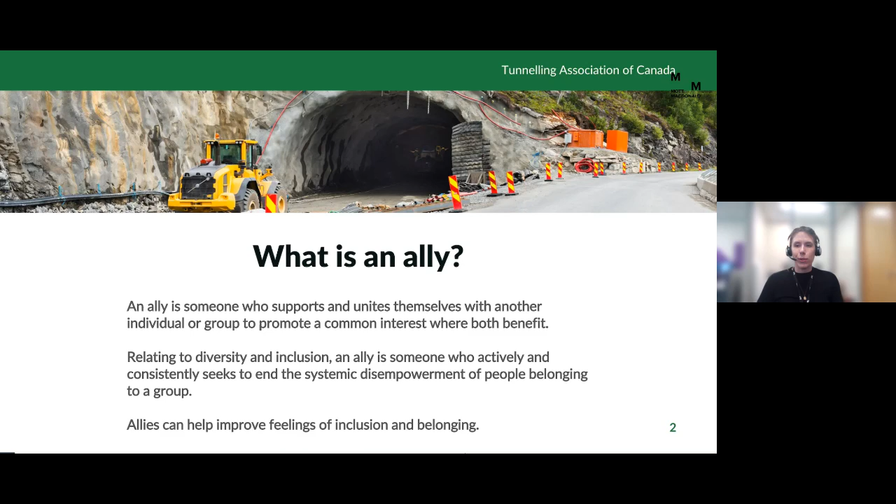Relating to diversity and inclusion, an ally is someone who actively and consistently seeks to end the systemic disempowerment of people belonging to a group. Allies can help improve feelings of inclusion and belonging. So how do you practice allyship?

Be a true listener, respect people's lived experiences when they share them with you, provide solidarity, stand behind, not in front of, provide the support you are asked to provide, not what you would imagine would be helpful or what you would do. Apologize for any mistakes you make. For example, if you use incorrect pronouns for someone or incorrect pronunciation, and move on without waiting for forgiveness from that person. And recognize the groups that you wish to ally with are not homogeneous in their thinking.

So now on to the agenda about what we'll be talking about today. So we're going to go through what's the purpose of site investigations, the geotechnical parameters that are of interest on tunneling projects, some different methods of data collection, but we're not going to go into exhaustive detail on that, field and laboratory testing, staging site investigation programs, and then we'll talk a little bit about uncertainty in parameters and interpretation, and finally, we'll end with some data visualization.

So I want to start by giving you a little bit of a disclaimer, and that is that every single tunneling project is unique and that there is absolutely no one-fits-all solution. So the answer to site investigation and the questions in this presentation is typically, it depends.

So let's start by thinking about, why do we need site investigation information? And the site investigation information really comes down to defining risk, selecting methods of mitigating that risk, and allocating that risk. We use site investigation information in tunneling to select our alignment, whether that be in the horizontal or in the vertical plane. Selecting the right construction methods, so that can be both excavation methods and dewatering requirements.

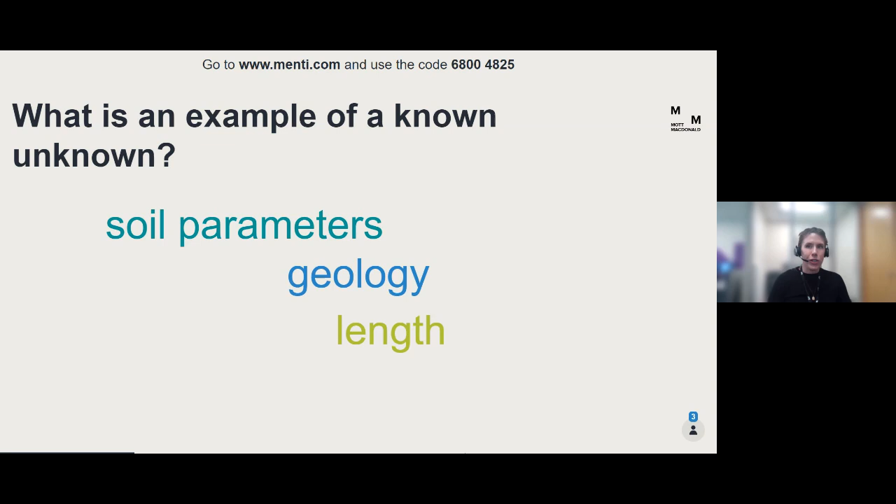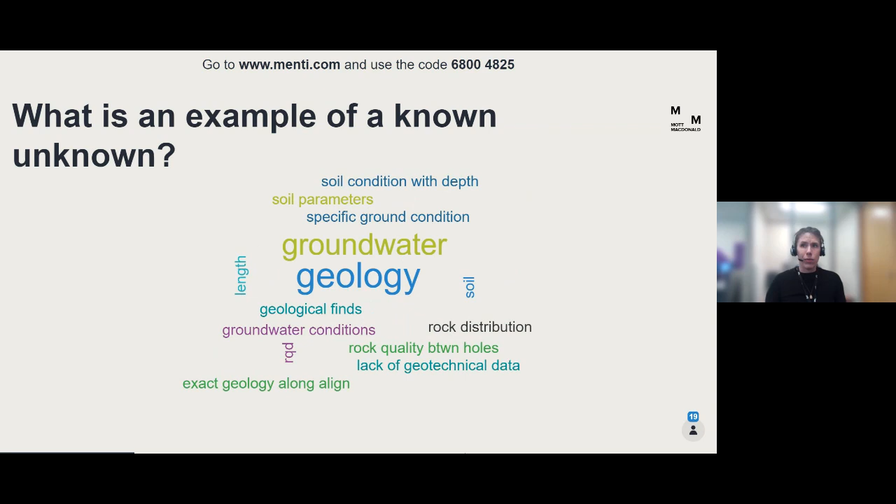The geology, definitely the geology. We might know a little bit about it, but we don't know a lot until we do a site investigation program. Groundwater conditions, that's another definitely known unknown that we would want to get more information on. Rock distribution, perfect. RQD, great. So those are all things that we can get more certainty about by doing a site investigation program, but at the beginning of the project are definitely a known unknown. We don't have much information about it at all.

So the last bit that we think about when we're talking about a site investigation program are the unknown unknowns. So these are the big risk items. So what would be an example of an unknown unknown on a tunnel project? Something that you don't know that you don't know about. We'll wait for a few examples here.

An anomaly, buried objects. Yeah, buried objects are a key one there. Hidden tiebacks. So man-made things that you don't know are there. Maybe you have poor construction records in the area and you encounter them and then they cause a lot of challenges in your project because you didn't expect them to be there.

Historic workings, yeah, unexpected shear zones. That's another great example. So faults or shear zones that you didn't have any evidence of, didn't occur during your site investigation, and you don't know that they're there. An old fill area. So those are all great examples of unknown unknowns, unmapped features.

So just wanted one example here, and just the impact it can cause when you have arguably an unknown unknown or a known unknown, giving the example of the Alaska Way Viaduct project. So many of you know that there was a huge delay on this project. They had to build a rescue shaft, design a crane, remove the TBM cutter head, and replace the main bearing of the tunnel boring machine.

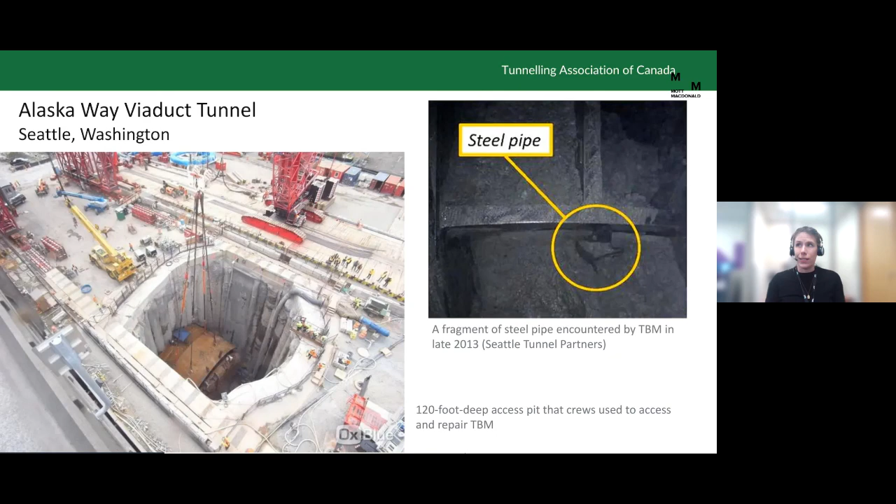So let's talk a little bit more detail about what information do we need. One of the things that came up through those known unknowns and unknown unknowns were the subsurface conditions. So this is a key for your tunneling projects to classify the subsurface conditions and characterize them. So this looks like the distribution of rock and soil, the different types, their properties, the condition of them, and stratigraphy. Another thing that was highlighted in those unknown unknowns was obstructions.

So we want to get a good idea of past construction in the area, of boulders we may encounter, of groundwater conditions, and other potential risks like environmental conditions, previous use of the site if there was a tannery there that might have caused some contamination.

And we want to get a really good handle on all the different sorts of geotechnical parameters we need for tunnel design. So there's parameters we want to get for soil, for rock mass, for other sorts of conditions, groundwater, and environmental. And we'll talk about some of these in a little bit more detail.

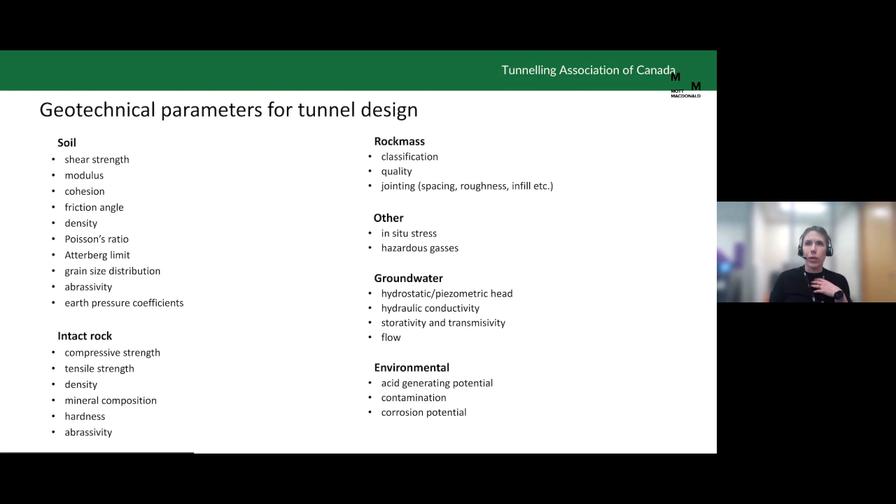So let's first talk about rock mass conditions, about the strength and quality of our rock mass. So why is this something we care about in tunneling? Well, it's an input into the assessment of our rock mass behavior, and it informs our construction methods and support selection. And we get this information by field mapping, by core logging, through laboratory testing, things like unconfined strength testing, and in situ testing as well.

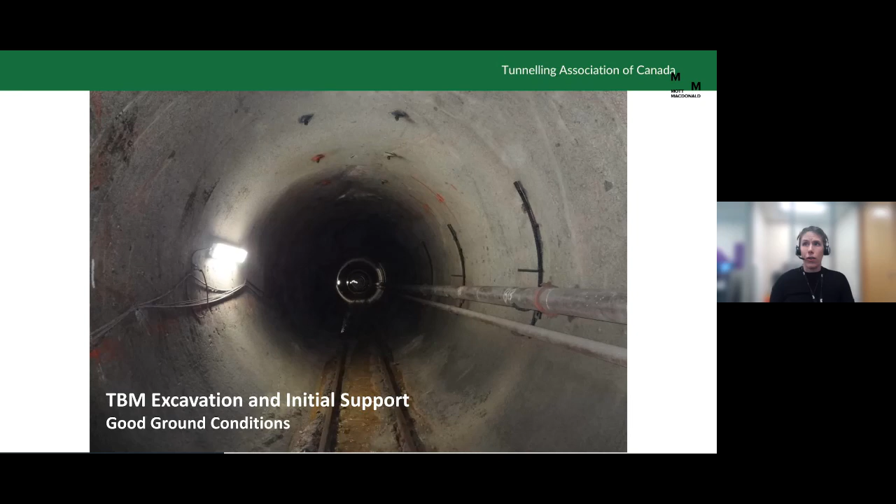So why does this really matter? Let's look at it in some photos. The variability of our rock mass conditions can completely impact the behavior of our tunnel. So this is an example of a TBM tunnel where excavation and initial support was in good ground conditions, and you can see a nice beautiful profile there. That's all exposed rock, so really nice tunneling conditions.

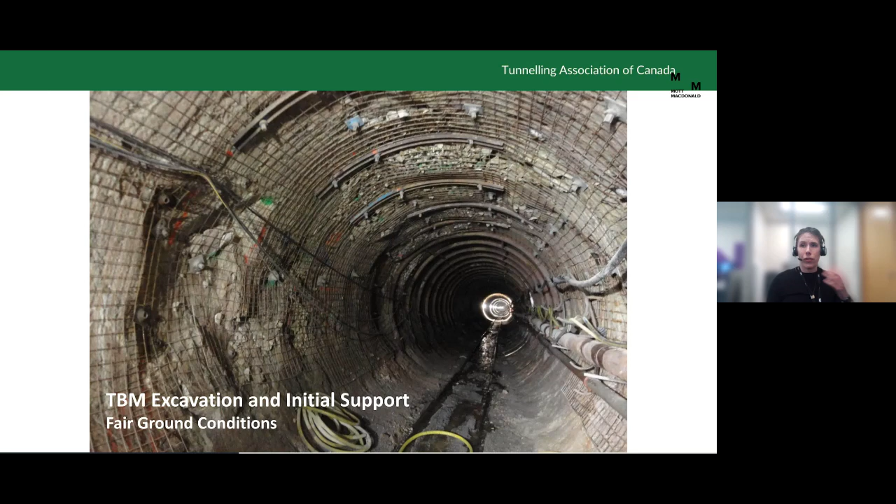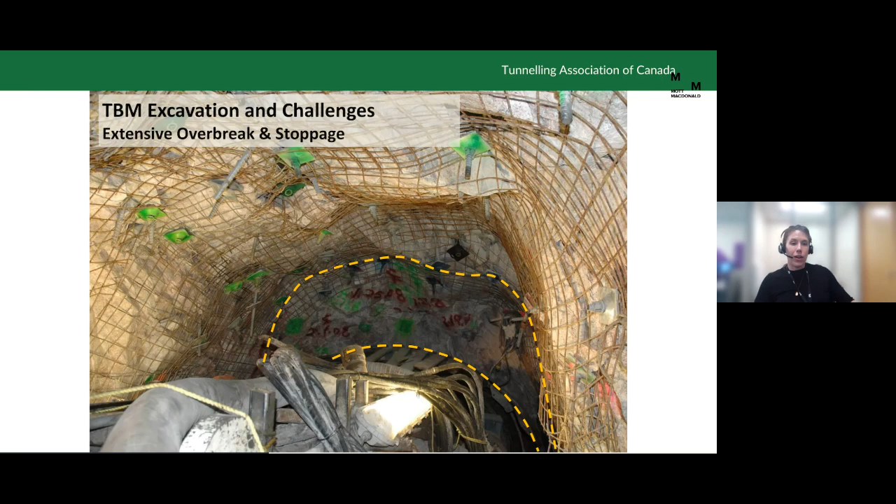And same tunnel again in our extensive overbreak and stoppages caused by very poor ground conditions. And these conditions weren't expected during the excavation, so weren't designed for and caused some significant delays on the project. So this is just one case example of why understanding those rock mass conditions is key at the outset of our project.

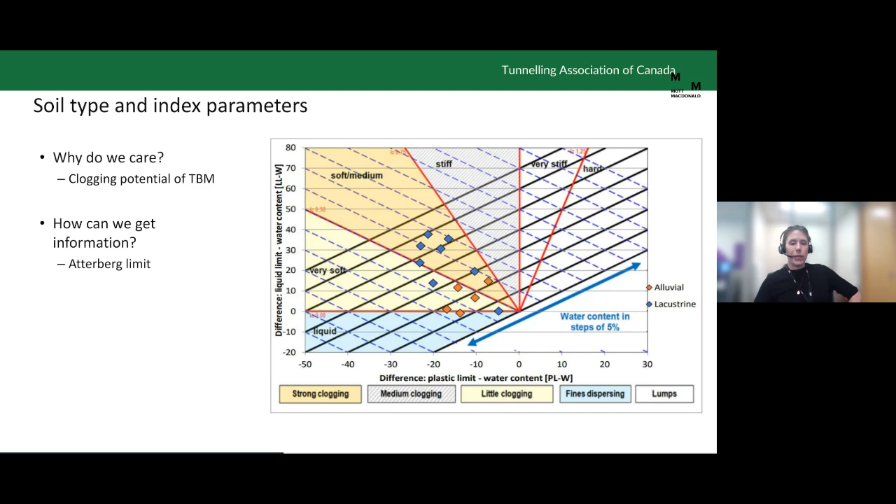So another thing that we'd want to know is the soil type and index parameters. And one of the key reasons to know this is the clogging potential of the tunnel boring machine. That's something we can get with Atterberg limits. So there's different ways we collect different pieces of information that are key for our tunneling design. So grain size distribution is another key soil parameter for building a tunnel in soil because it informs our TBM type selection, and we get this information through lab testing through sieve tests.

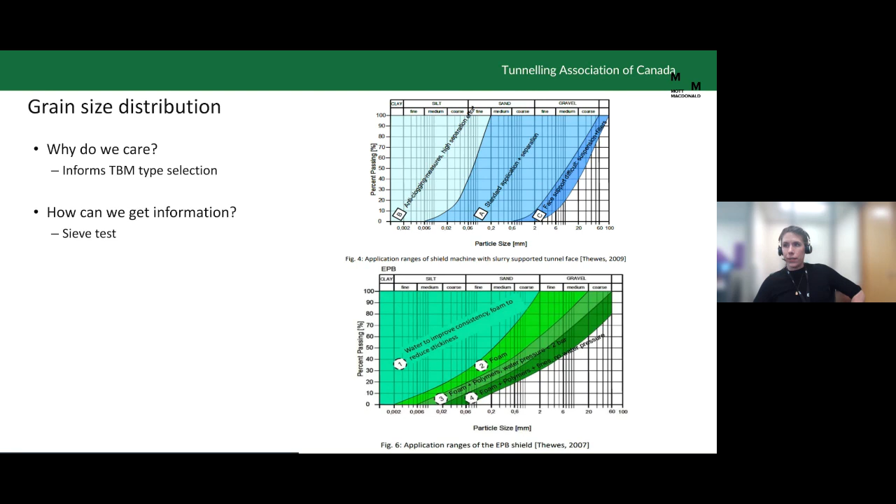For tunnel design, abrasivity is another key parameter as it impacts our rate of tool wear, and in turn, our advance rate prediction. So we can get this information from lab testing and petrographic analysis of rock and soils.

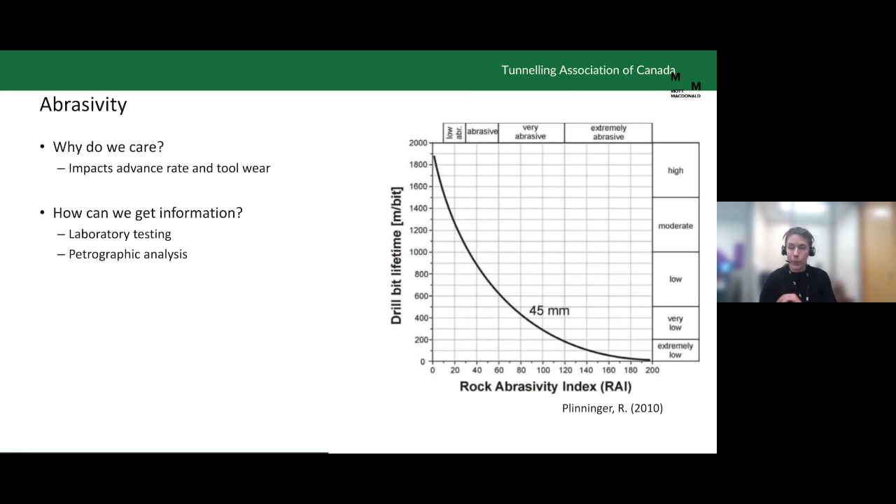Another key parameter is in situ stress. So in situ stress can have a huge impact on ground behavior. It can cause squeezing, spalling, overstressing, rock bursting in extreme cases. And we need to know those things in advance to inform the selection of the construction method and the support we need. And often in situ stress testing is challenging, but it is possible. But we also rely on past project experience in similar ground conditions in similar areas to get information on in situ stress. So this is just an example on the right here of failure that was exacerbated by in situ stress.

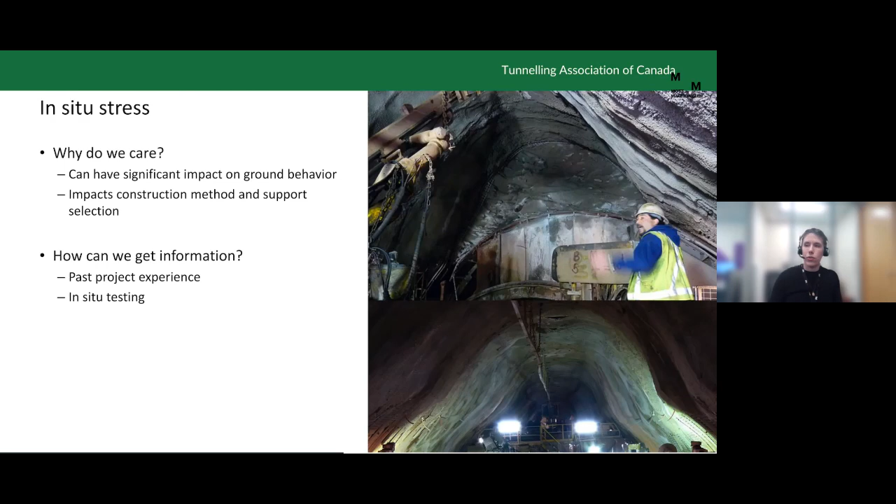Mineralogy is another key thing that we look for during our site investigation program. So different types of minerals can be detrimental to excavation. This could be swelling minerals or silica dust. On the right, you have an example of a project where swelling minerals caused about 1.5 meters of floor heave in the tunnel. So you can see how significant an impact that can have. And we get information on the mineralogy through petrographic analysis and X-ray diffraction.

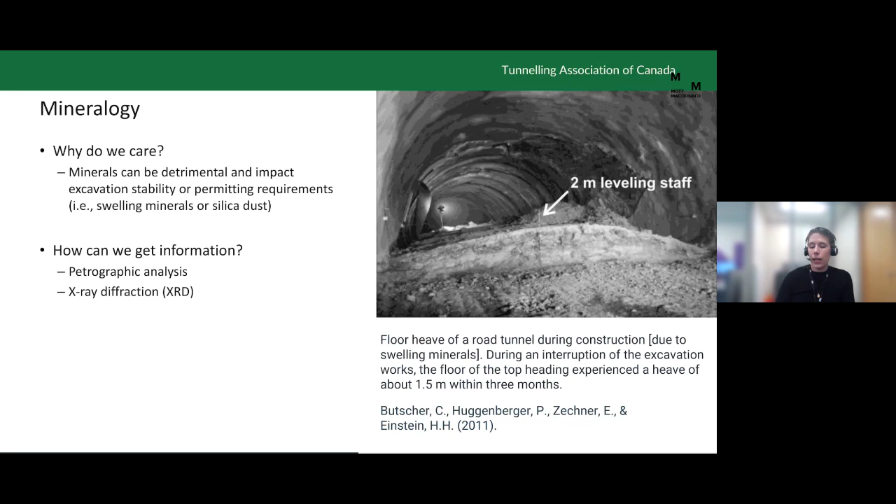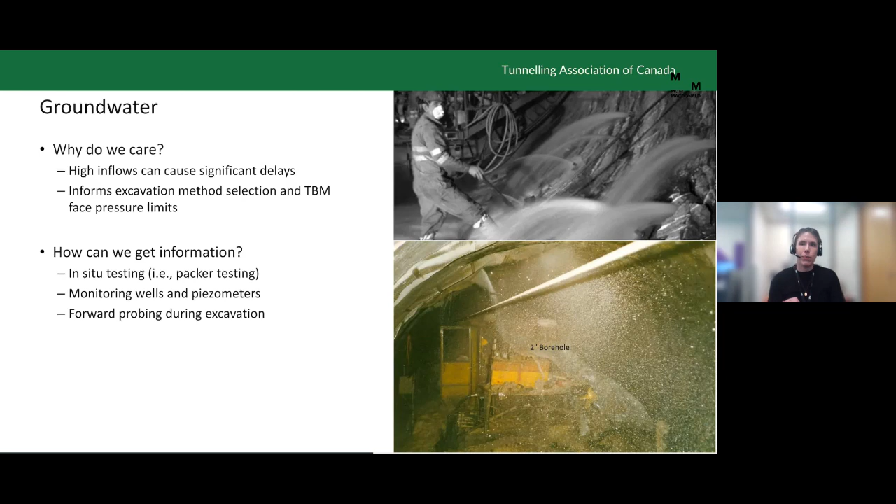And just for context, that photo on the right, that thing that looks like a rope, that's actually a stream of water coming from a 2-inch borehole. So really, really high pressure, safety issue at that point. So we want to know those groundwater conditions ahead of time. And we do that through in situ testing, through monitoring wells and piezometers, and through forward probing during excavation as well, and can manage it through pre-excavation grouting.

So let's now talk about the stages of a site investigation program. Typically, we don't do all the investigation at once. There's different stages of investigation aligned with the progression of our design. So at the concept or feasibility stage of a project, there might be limited on-site site investigation. We'd start with a desktop study. Then as we move into preliminary design, moving into field mapping and a site walkover in order to inform and plan your stage 1 investigation program. And then as you move into detailed design, often you'd plan a stage 2 investigation program where you're filling in more details.

The deliverables out of each of those look slightly different. So at the desk study stage, we'd be looking at something like an initial geotech assessment, moving into a preliminary geotechnical data report, an interpretive report during your stage 1 investigation. And as you get to the end of your detailed design, often your deliverables look like a final geotechnical data report, interpretive report, and geotechnical baseline report. Now, I'm not going to talk in a lot of detail about those different deliverables today because we're going to talk more about the investigations themselves.

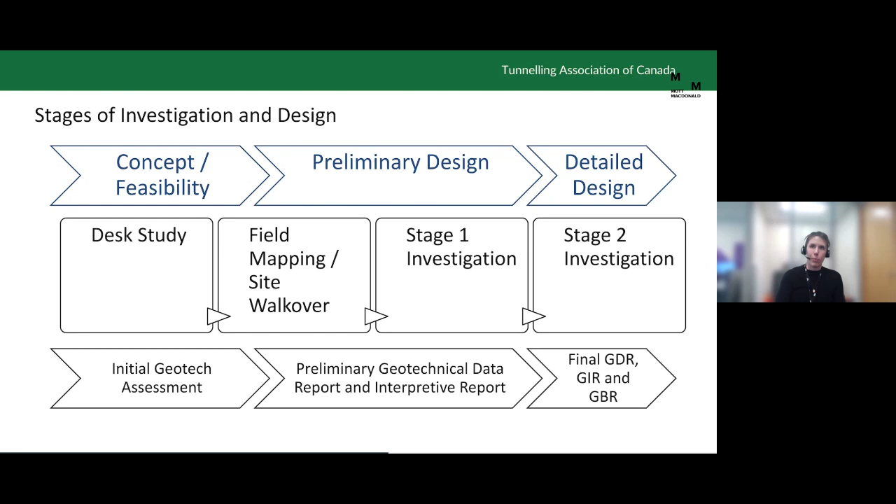So a desktop is typically what you do at the start, at the concept stage. You should always be starting with a desktop study, looking at historical investigations and available data that you have from past projects in the area, any past project construction experience, available geological maps, be it bedrock or surficial or soil data, air photos of the area, especially if you can get air photos of the area over time to see historic use and change in the landscape, information about seismic hazards or other hazards.

Walking through the area on Google Earth can be really useful, looking for overhead obstructions, roads, railways, those sorts of things, and any areas of interest, be it archaeological areas, if there's areas of environmental sensitivity, and understanding historic use of the site, which can help you understand if there's any contamination.

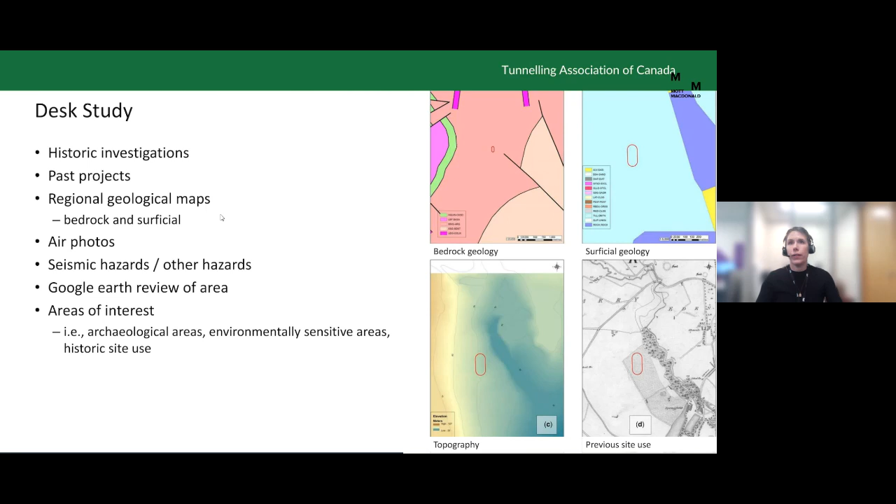The next stage we would move into is field mapping and a site walkover. So now we're assuming we know where our project area is, where our approximate tunnel alignment is, and we want to get a better understanding of potentially adjacent infrastructure, sensitive buildings or overhead power lines, if there's any access constraints that we might be dealing with both during our site investigation, but also during construction.

We'd be looking for evidence of potential geohazards, so that's things like slope stability issues, completing geological mapping of outcrops or subcrops if there is exposure in the area, collecting information on jointing and rock mass conditions, and geology, and also selecting locations for further investigation. So a site walkover is the best way to site where you want to actually be drilling your boreholes or performing any other types of investigation works.

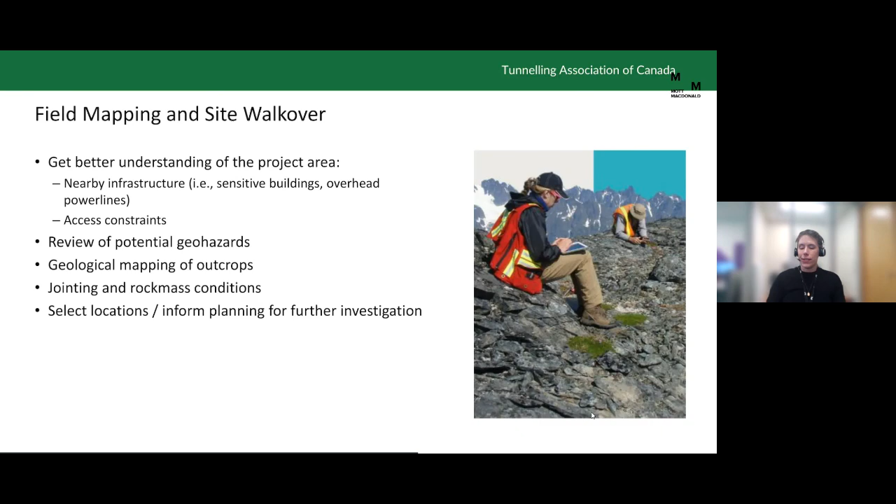Remote sensing is another way we collect data. So methods of remote sensing include LiDAR, photogrammetry, collecting drone footage or satellite data like InSAR, and those different methods can be done airborne. There's mobile terrestrial ways to collect that data, so that means on the back of a car, or static terrestrial, so on a tripod. So the examples on the right are just different types of LiDAR data.

And through that, you can get topography, a very good model of your site surface. You can do site characterization and also gain geotechnical data. So from LiDAR surveys, for example, you can get joint orientations, shear zones, those sorts of things.

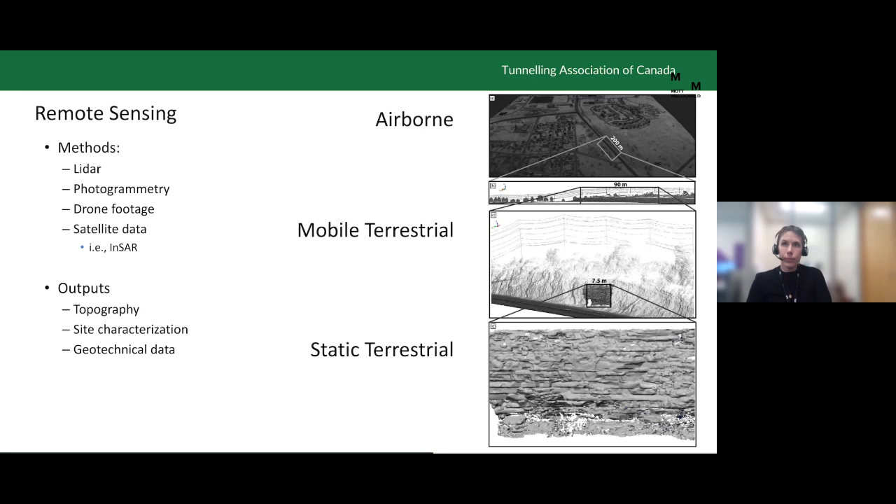Next, we get into our actual intrusive site investigation methods. So test pits and trenches. These involve excavating the first few meters of soils, and those help you understand the stratigraphy that you're dealing with. You can identify cobbles and boulders size and distribution using these type of methods. But the challenge with test pits and trenches is they're limited in depth and stability depending on the soil types, and you only can collect disturbed samples from test pits.

Next, we have geophysical surveys. There's a variety of methods available for geophysical surveys, and I'm not going to get into detail on all the different methods today, but those can help collect different types of subsurface information. And then boreholes, where you're collecting samples of soil or rock and can complete in situ testing.

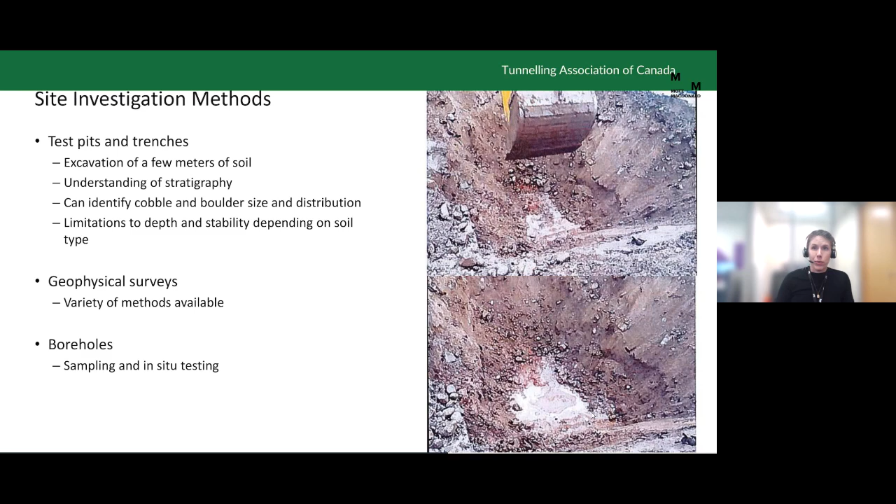So everyone grab out your smartphones. We have another activity here that I'm going to ask everyone. So, should you do geophysics or boreholes first? I'd like to see your votes on which you think you should be doing first. There's 4 answers to pick from: geophysics, boreholes, it depends, or not sure. So I'm going to give a minute or two for folks to respond here.

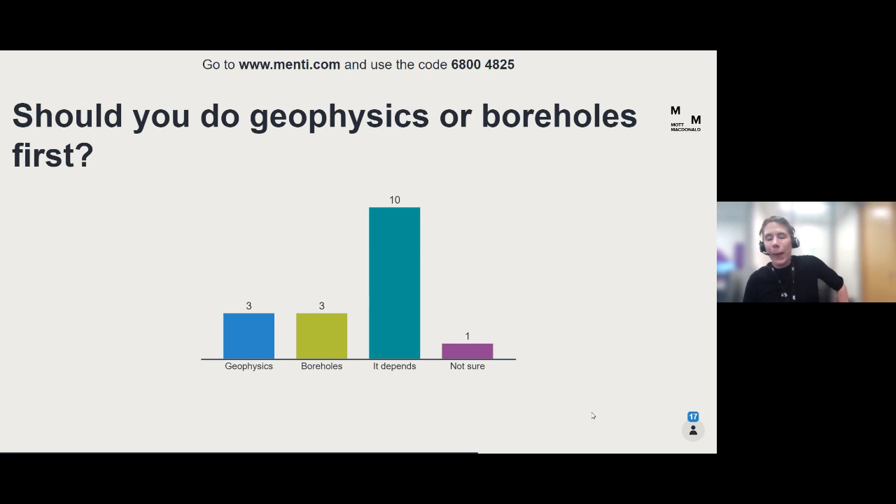So far, I see 2 votes for boreholes, 1 for it depends. Oh, it depends is taking the lead. You say geophysics, more saying it depends. I'll let the answers keep rolling in, but my opinion on this topic is just like everything in geotech, it depends. The most important thing is that you're tying your geophysics and your boreholes together.

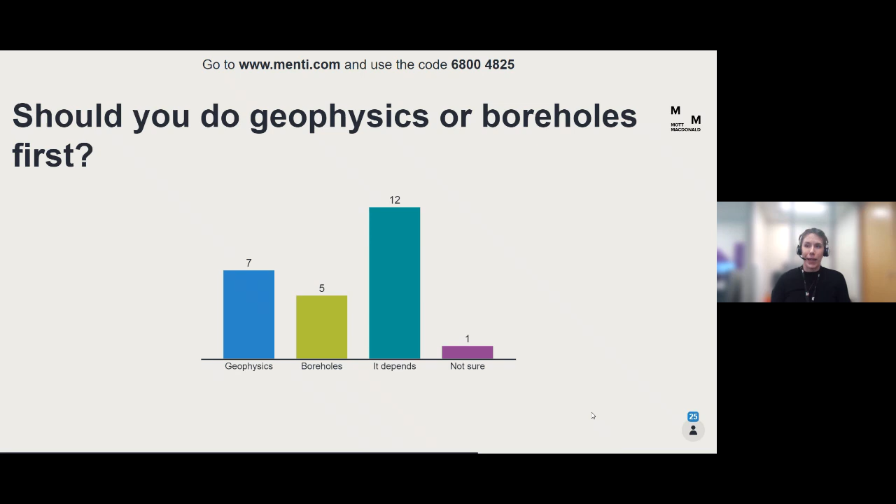Sometimes you do geophysics first and you'll find anomalies that you want to check by using boreholes. Sometimes you'll do boreholes, and in order to tie your boreholes together, you want to do geophysics. So I don't think there's a right or a wrong answer about which you do first. I think the answer is it depends, and it's on a case-by-case basis.

All right, so we have another activity here. So I'm going to give some background. So this is a project where each color shown on this section is a different geological unit. These are all rock units, and they're all dipping to the left-hand side of the page. So those dashed lines there are the contacts between the different units.

If you look at the plan in the top, you'll see blue areas, and those blue areas are glaciers. So if you're drilling on top of the glacier, you do need to consider that you're going to be building a platform on ice and dealing with a moving glacier. On the glacier to the left-hand side, you can see a red squiggly line. You can see it in the section as well. That's an inferred fault. So no evidence of that fault, but it's assumed to occur there due to the contact between the 2 different units.

So what I would like to know, if you only had the ability to do 1 borehole, where would you locate that borehole? I'm seeing a couple different locations that people are picking, so we'll give a few more seconds here. Someone's picking the top of the mountain, I see.

So just for scale too, the tunnel is under about 1,000 meters of cover. So drilling from the top there, we'd be drilling over a 1,000 meter borehole. Do you have any other thoughts? I see lots of dots on the page so far. Some at the end, some at the portals, some on the purple. Awesome. So lots of different ideas of where we should be drilling boreholes for this alignment.

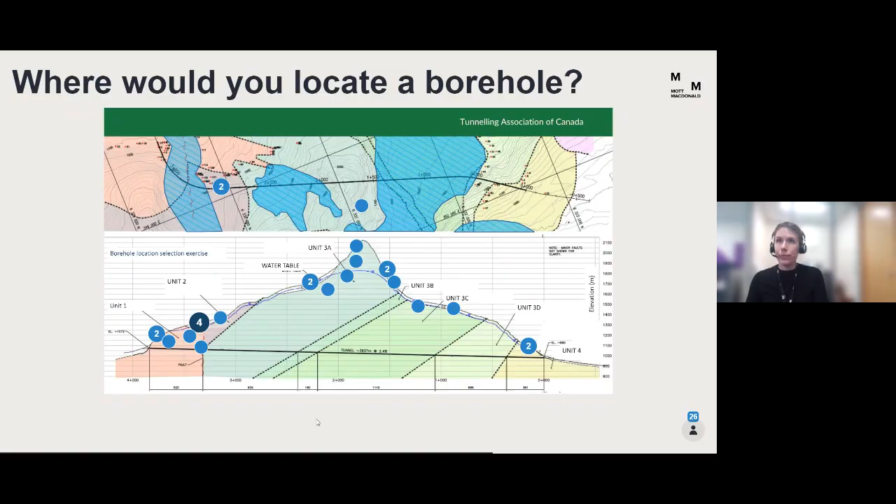So one thing when we're doing our site investigation programs is that we want to characterize varying site conditions. We've got to recognize that tunnels are linear projects that go through a range of conditions, and that rock mass variability, even if we're in the same unit for the entire length of the tunnel, can lead to different performance of our tunnel. For example, the angle of schistosity can cause a significantly different response to our tunnel. So this is an example of a project that was all constructed in the same schist unit, but the angle of schistosity relative to the tunnel or to the loading direction significantly changed the compressive strength of the rock mass.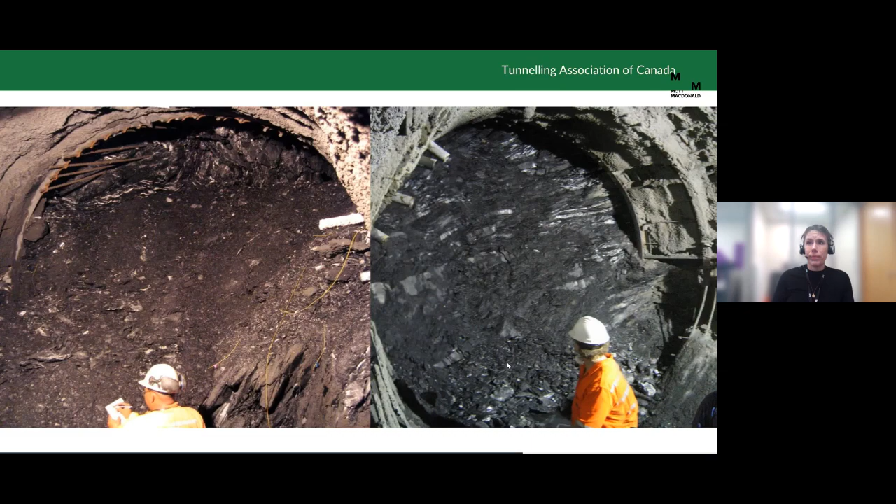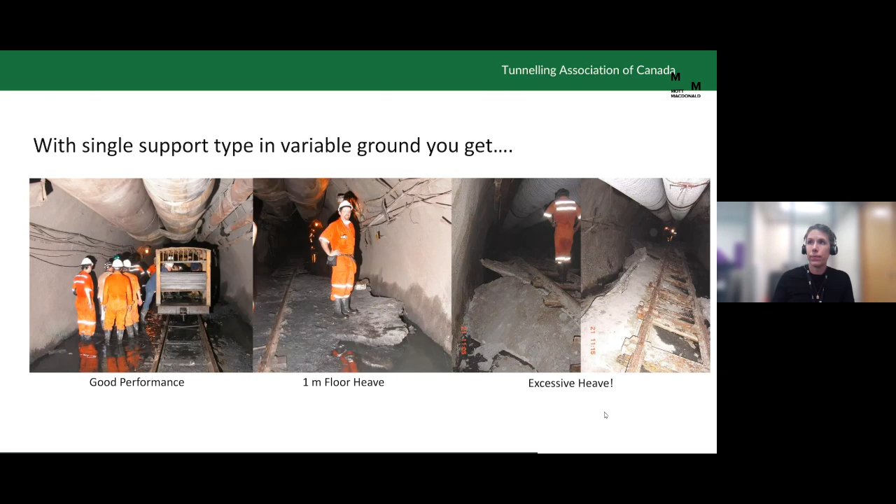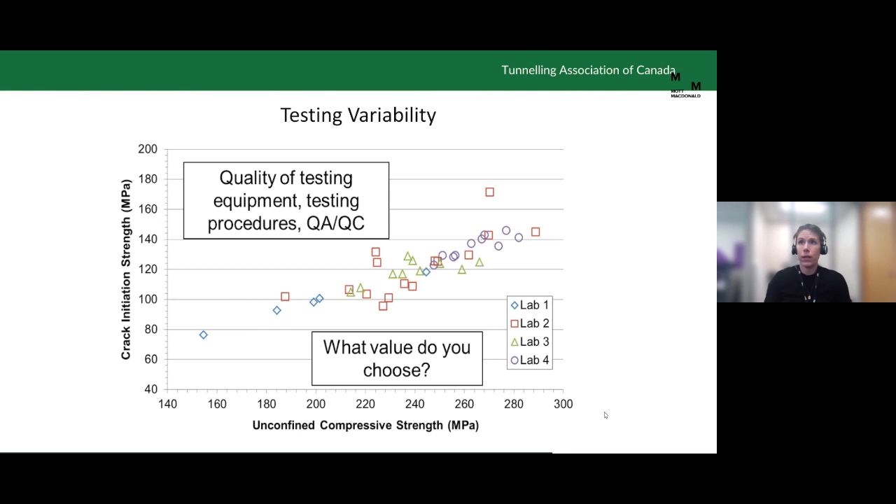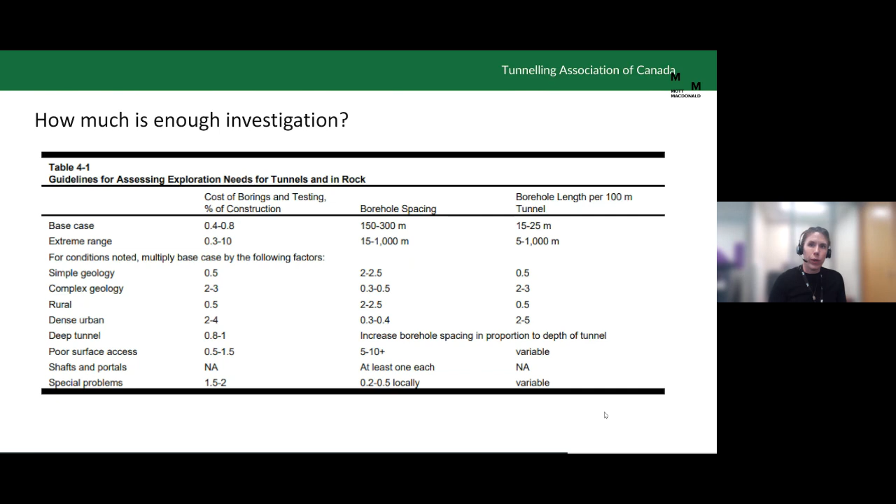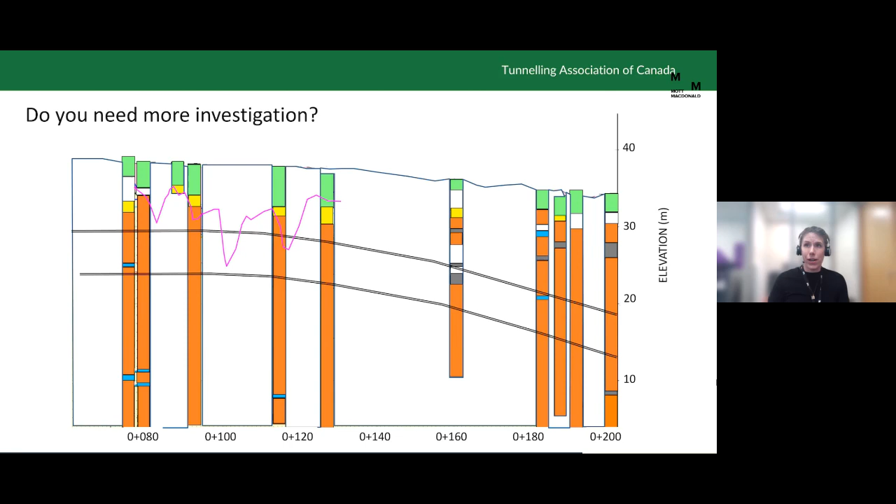Yes, possibly buried valley. Another yes, potentially Buried Valley. If there's budget, then yes. Yeah, I like that answer. Yes, to find out the dip in the geophysics. Yes, yes, water level, soil profile varying. Yes, no, yes. So lots of different thoughts here. Yes, investigate the dip in the purple line.

So I would say the answer, in my opinion, again, is that it depends. It depends on what your design solution is. Does your design solution care that you're going through rock or soil, or do you have a robust solution that is sufficient no matter the ground conditions? If the soil or a dip in that soil presents a big risk, then it would be more important to characterize if that actually exists or not.

Do you have enough fair information or not? It all comes down to risk mitigation. Might be a fault. So if you do think there's a reason that there's a fault there, that might be something you want to investigate more. So again, answer is it depends. And like I said, it really comes down to risk versus mitigation.

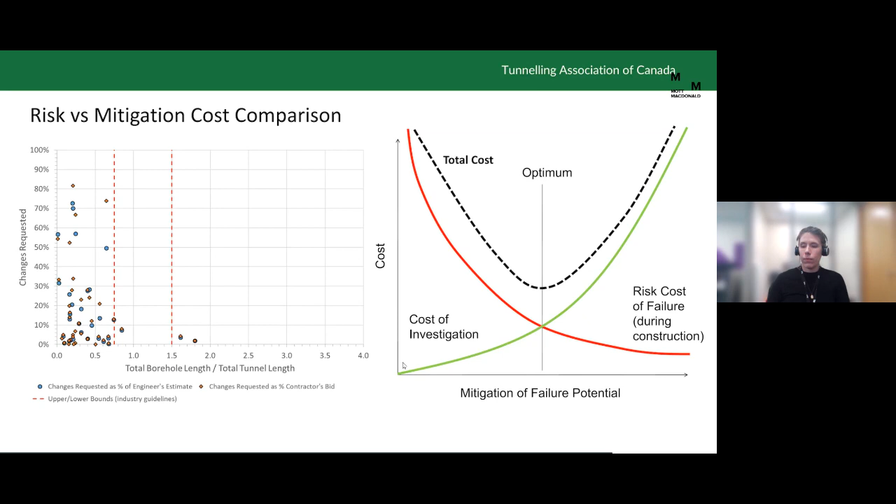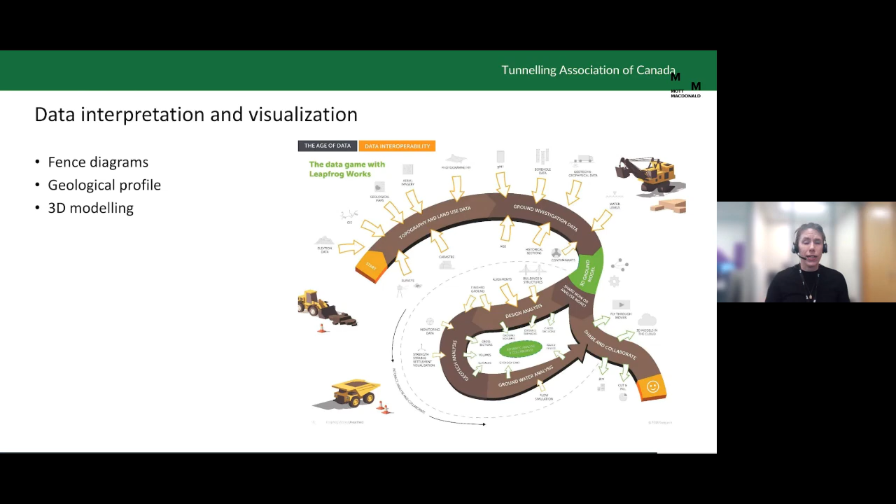So then I'm going to move on to the last part of the presentation, which is about data interpretation and visualization. So once we've collected all this information, part of it comes down to writing our reports and our deliverables and putting together our geotechnical baselines. But again, I'm not going to talk about those in a lot of detail today. But one of the things we do is trying to visualize our data. And that can come down to things like fence diagrams and geological profiles. But what's becoming more and more common these days is 3D modeling. So I'm just going to switch screens here and show you some examples of 3D modeling of geotechnical site investigation information.

So this first example here is using, and I'm hoping this plays. Oh.

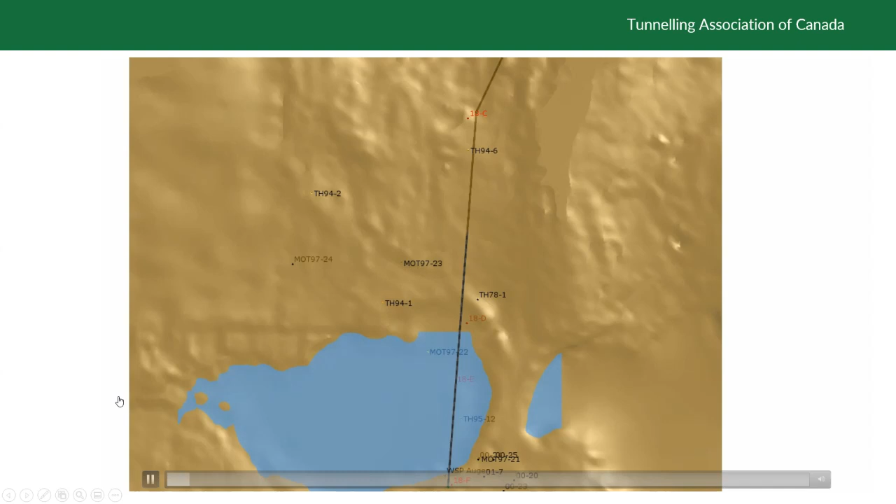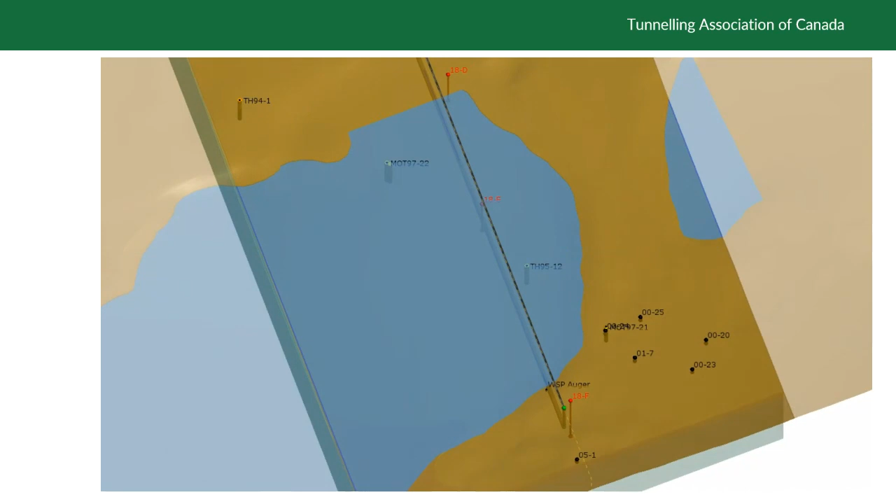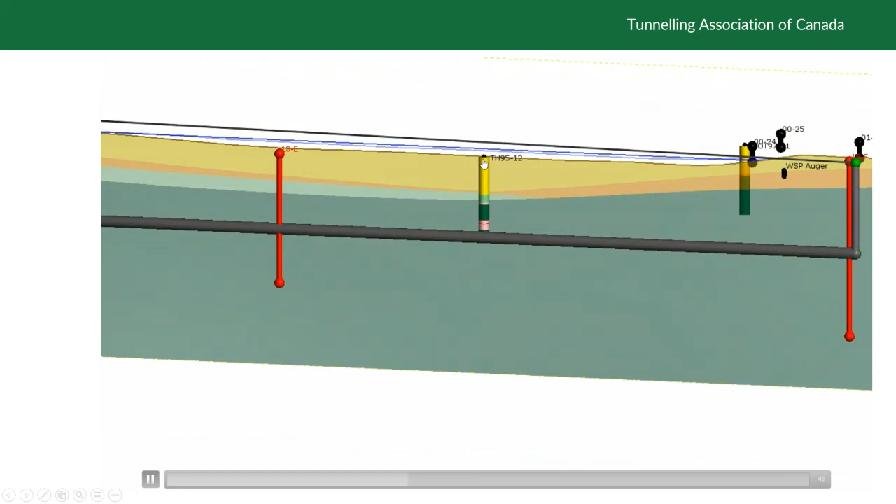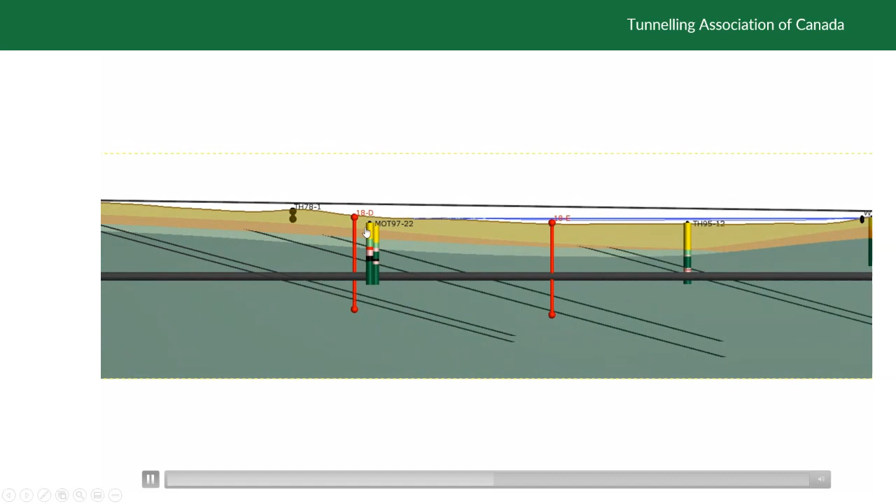So this is an example of a project that displays in 3D both the existing site investigation information and uses the interpretation of that information to help with planning new borehole locations. So the ones you see in red there are planned boreholes, and everything you see in black that has colors are existing boreholes. So as we zoom in here, you'll see the different stratigraphic units in the boreholes and the interpreted geology. And these dark gray lines are expected shear zones or dips, and we're targeting those, and we're able to select locations to plan our site investigation holes by using this 3D model. It helps facilitate ensuring we hit those units.

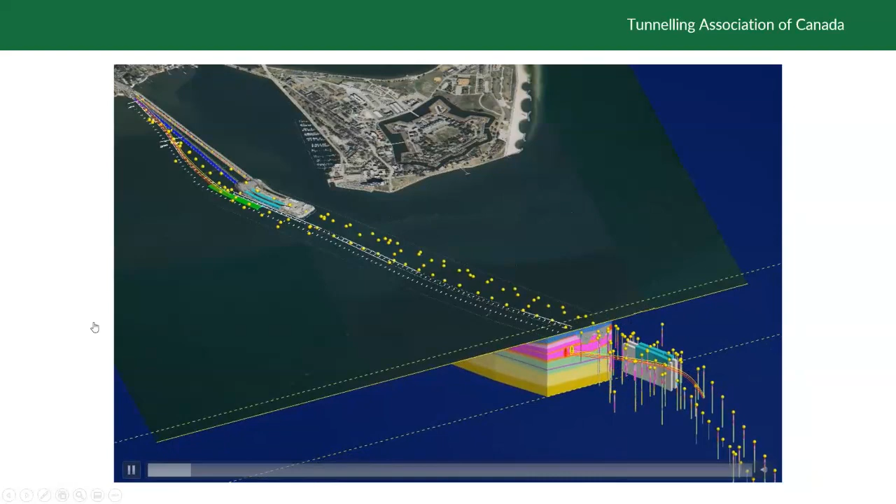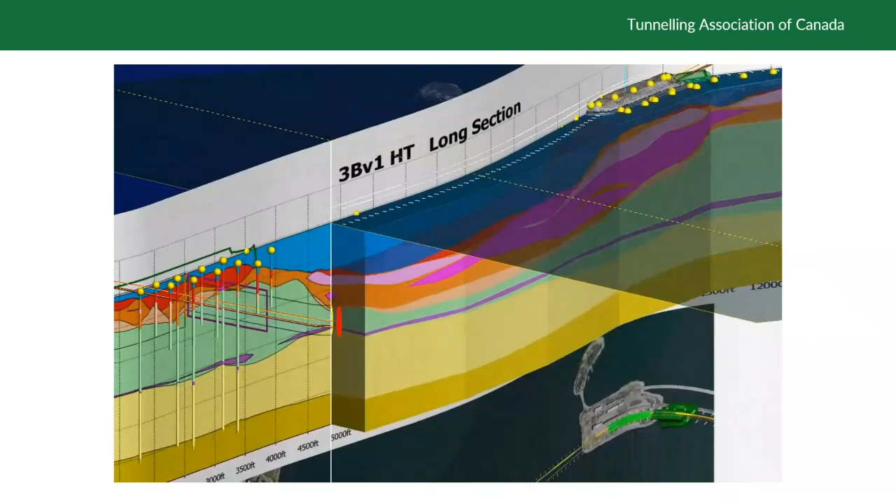So I have one more example here, and this is a much larger project with significantly more site investigation. There's many boreholes here, and you can see how the boreholes were used to develop this 3D model, and then the 3D model itself can be used to export both long and cross sections of the tunnels. So this is using Leapfrog, which many people on this call are probably familiar with. But you can see the export of the 3D model into 2D for communication purposes. Great.

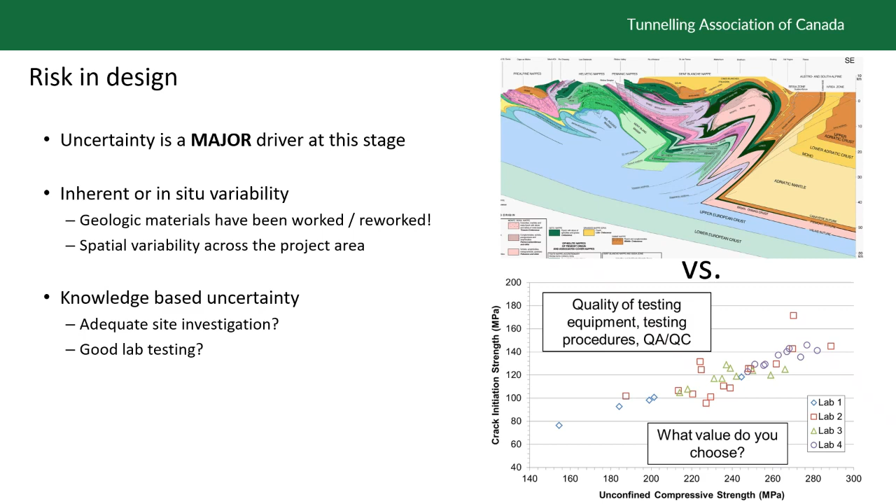So as we said at the beginning, your site investigation really comes down to mitigating your risk, and uncertainty is the major driver of your site investigation program. That comes down to the inherent in situ variability that we deal with in tunneling projects. So the fact that geological materials have been worked and reworked over time, as you can see on this top right geological model, very, very complex conditions, and that the conditions are going to vary across our project area. So we need to know what we're going to encounter during the tunneling excavation.

And it really comes down to how much uncertainty is acceptable. Do we have an adequate amount of site investigation? Can we rely on the lab testing data that we have? We talked a little bit about the variability in lab testing and whether that's reliable or not, or if that's actually inherent variability within the rock mass condition.

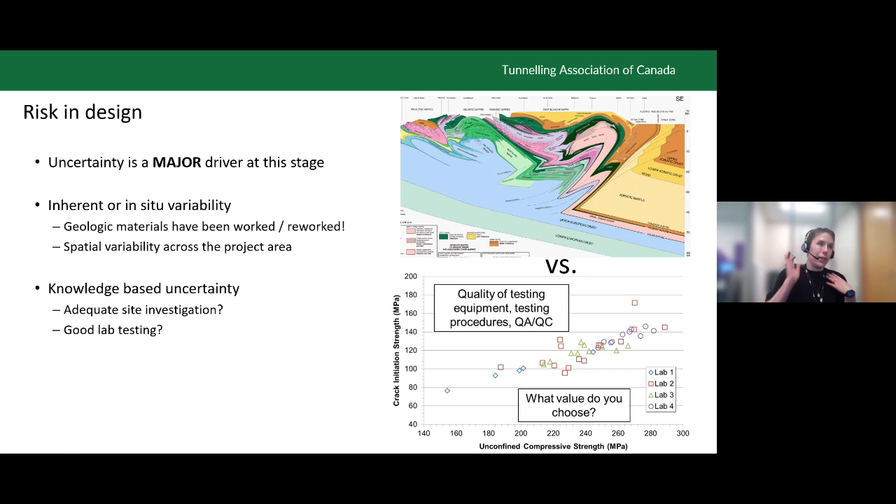So in summary, site investigation programs are really used to reduce that uncertainty and to allow us to have more accurate cost estimates and schedules. We know from project after project that unforeseen ground conditions can have a huge impact, both time and money. So whatever we can do to reduce the risk of unforeseen ground conditions is of value to the project.

So the extent of your site investigation program should really consider the complexity and uncertainty of your geology, what existing geotechnical and geological data is available from past projects, where your project is located and the accessibility of your site, whether you're in an urban area or a really remote area, what the depth of the tunnel is and the alignment, what available funding you have, both for the site investigation program, but also for risk and for contingency management.

What stage of the design are you at? Are you at the beginning? Are you at concept level? Are you at the end of detailed design? What's the timeline of the project going forward? What are the accuracy requirements of your schedule and your cost estimate? And what is the tolerance for risk?